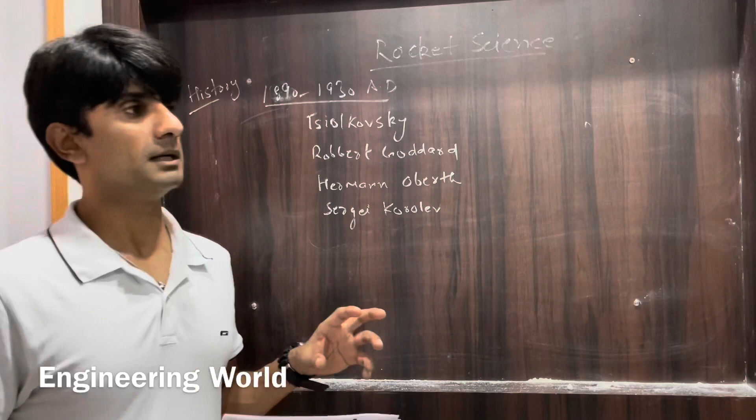As you already know, before this time period, Newton was born and he gave his laws of motion and also the universal law of gravitation, and with the help of these laws much development was made in the field of science and even in the field of rocketry. So these people I am going to talk about now made use of those concepts to put forward development in the field of rockets.

This man is also known for giving the idea of multi-staged rockets, so that's why he's known as the father of modern astronautics. Now next comes the rocket scientist Robert Goddard.

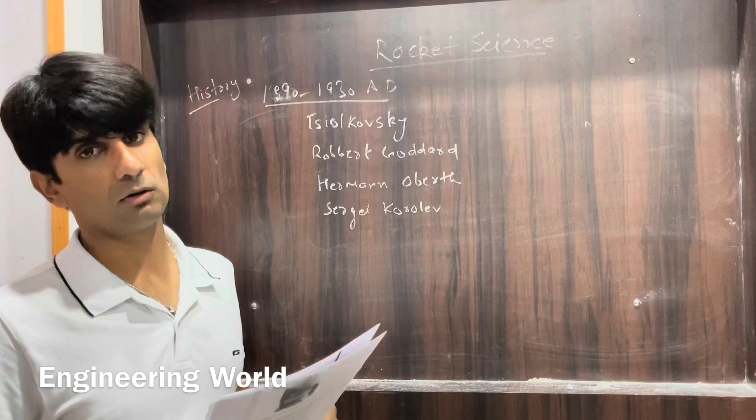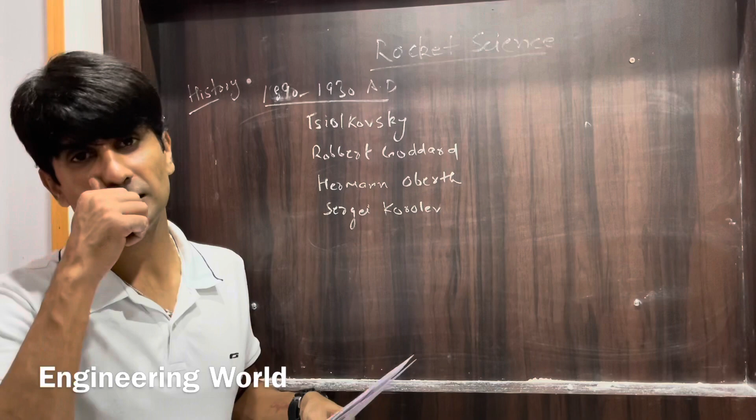He was an American, born in 1882 in Massachusetts. He initially conducted many experiments with solid rockets, but he was finally confirmed that liquid rockets were much better to carry more payload to greater heights.

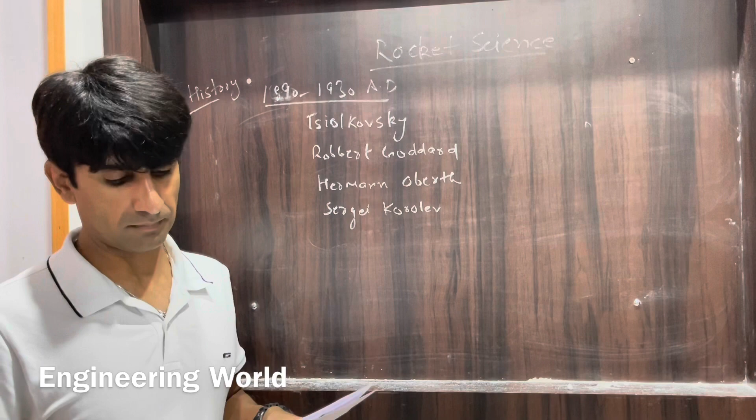For this he launched his first successful flight of a liquid engine on March 16, 1926, and he also wrote a book, A Method of Reaching Extreme Altitudes. That's why he is known as the founder of modern rocketry.

Next comes Hermann Oberth. He was a Romanian, born in Romania in 1894. He published a book, The Rocket into Planetary Space, and he also discussed the effects of outer space on the health of

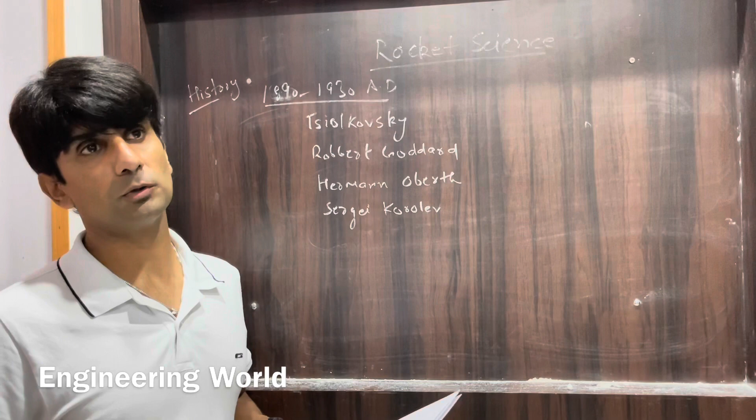human beings. And with the help of Newtonian mechanics, he gave an idea of how a rocket can successfully launch a satellite into outer space.

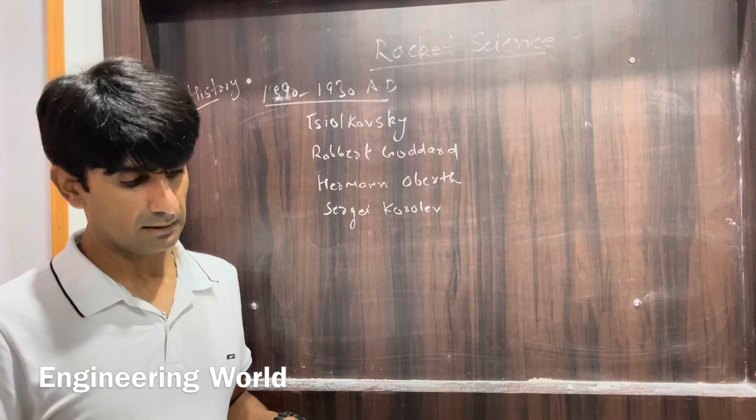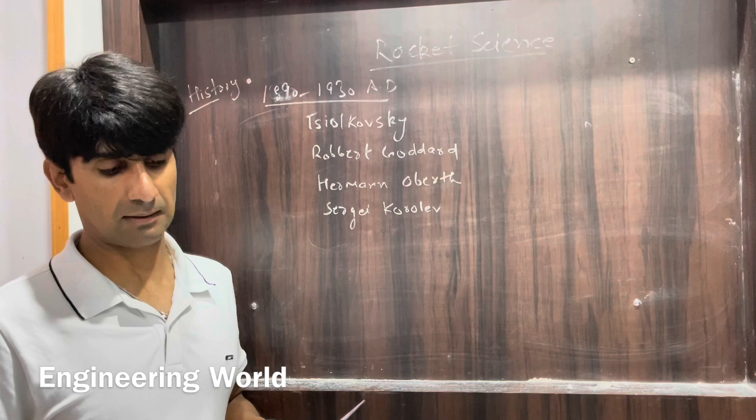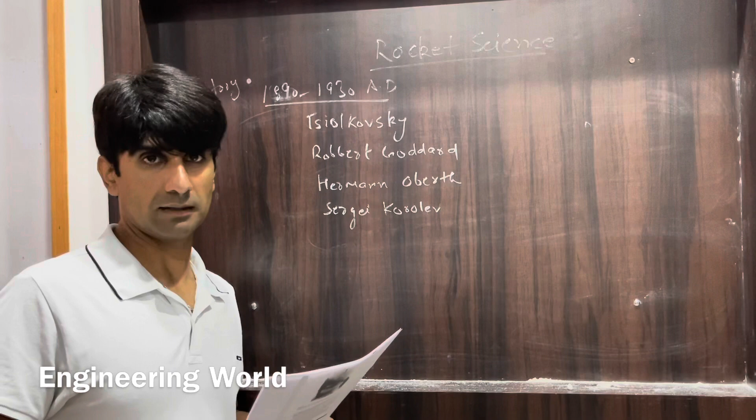Within this time frame, in 1929, Goddard himself launched a rocket with a barometer, a thermometer, and a camera into space. And when it came back, all the things were successfully recovered, so it was quite a successful attempt from him.

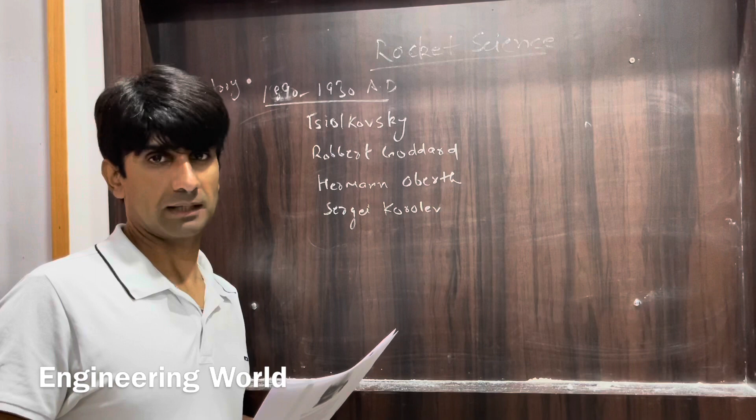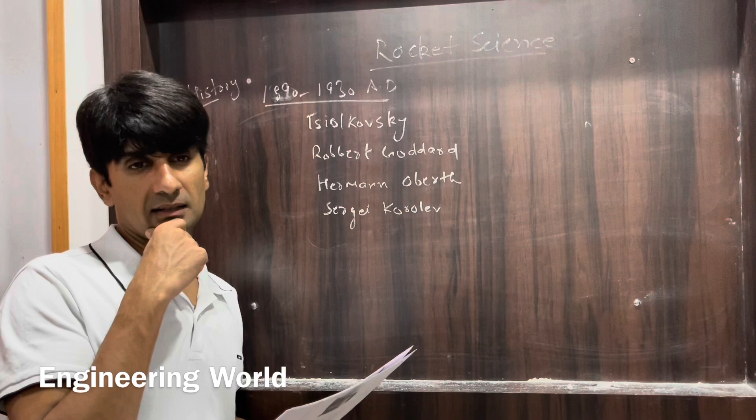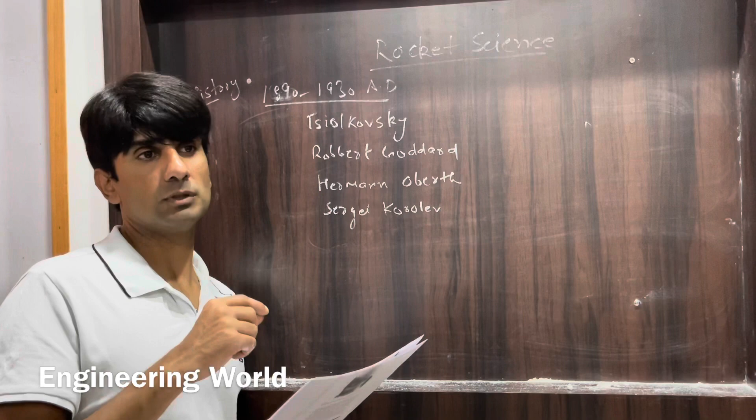And the next is Sergei Korolev. In 1907, he was born in Russia, and this man acted as a catalyst or a spark for the Russian space program. This man's contribution is no less than what Wernher von Braun was for the American space program. This man was responsible for increasing the Cold War between America and Russia, and he contributed a lot toward the Russian space program.

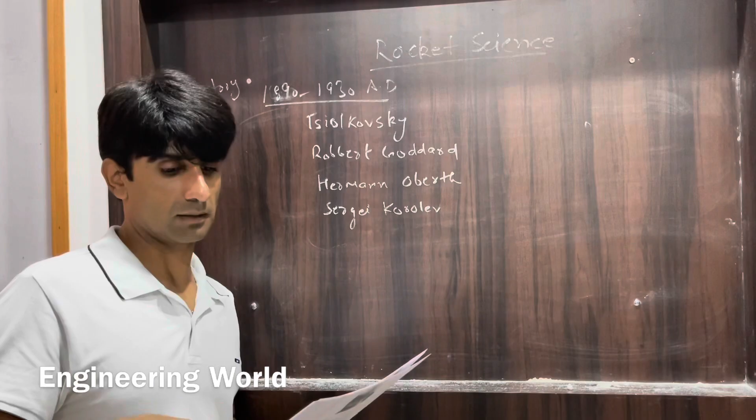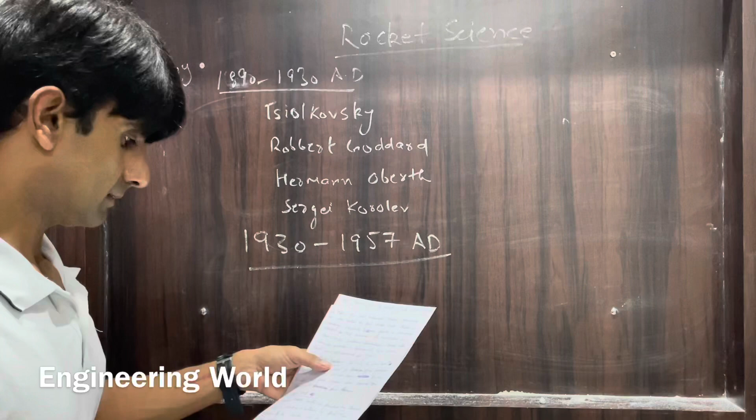And now we will discuss the period from 1930 to 1957 AD. In this period, the American Rocket Society was founded by David Lasser in April 1930, and in 1931 Lasser published his book, The Conquest of Space, in the United States.

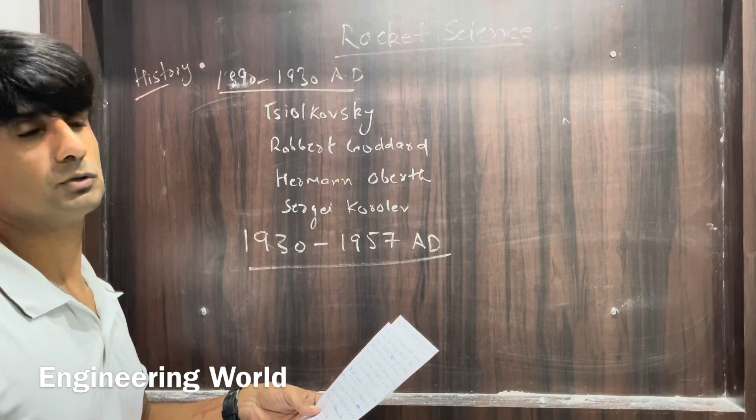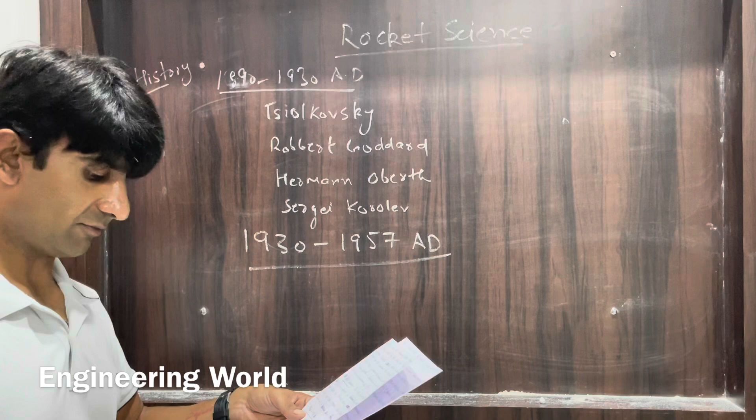The aim of the society he founded was to encourage the interest of the public in space exploration, so that more people could join it, take interest in it, and contribute towards it. Also, a mail-carrying rocket was launched in 1931. In Germany, the space organization VFR launched a liquid fuel rocket.

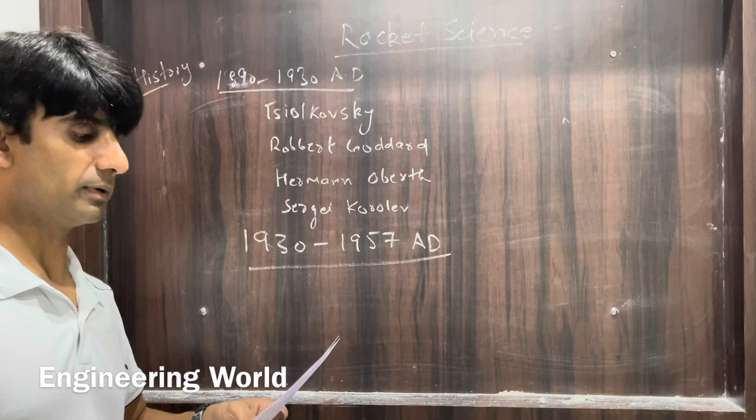In 1933, Soviets fired off rockets with both solid and liquid engines. So all these events happened in this time period, that's why I'm discussing it.

In 1934, von Braun and his team launched two rockets that both achieved altitudes of nearly 2.5 kilometers. The same year, Goddard developed a rocket that was faster than the speed of sound, which was quite an important achievement in rocketry. Caltech, the California Institute of Technology, became the Jet Propulsion Laboratory as it started testing rockets.

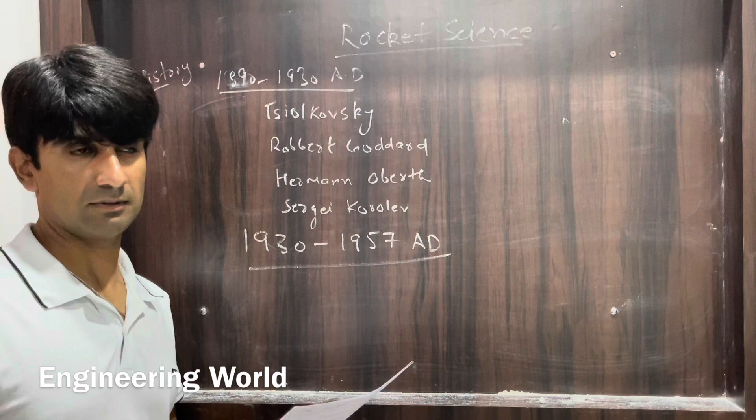In 1937, when the Nazis disbanded VFR, the German space agency, German scientists started working for Hitler's military at Peenemünde, under the guidance of von Braun, and they developed the fastest rockets ever known to man, the most important being V1 and V2.

The V2 rockets were used in the Second World War and could travel up to 200 kilometers, carrying a payload that could destroy a whole city.

Some of the scientists, after the World War, were arrested by Russia and the US, including von Braun, who was taken to the US along with other German scientists, and they started working for the US. During the war, in the 1940s, the US launched a rocket-assisted airplane.

At the end of the war, the captured German scientists were moved to New Mexico to further develop rockets. In the 1940s, the US developed a rocket based on liquid hydrogen and liquid oxygen.

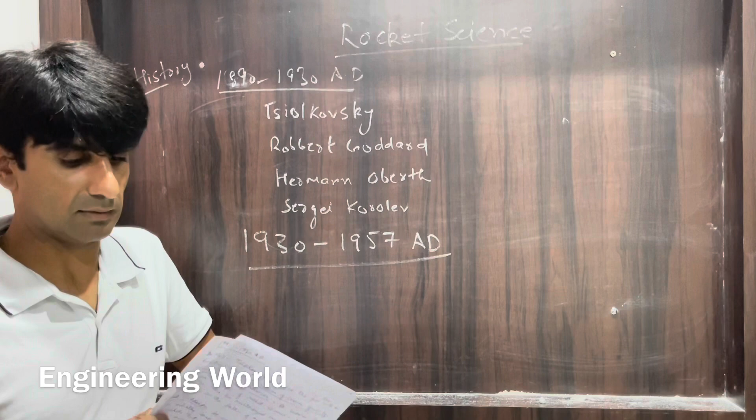During this period, the race between the US and Russia regarding rocket development sped up to a great extent, and Florida became the rocket test range in 1949 under President Harry Truman. In 1945, Goddard died of cancer. So these were some important events that took place in this time period, and I will discuss some more.